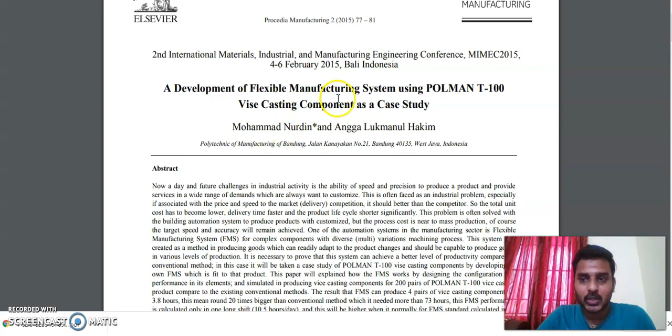Today we are going to see a case study on the development of a flexible manufacturing system using a POLMAN T-100 vice casting component. In this case study, it is given that nowadays the future challenge in industrial activity is the ability of speed and precision to produce the product and provide a service in a wide range of demands which are always wanted to be customized.

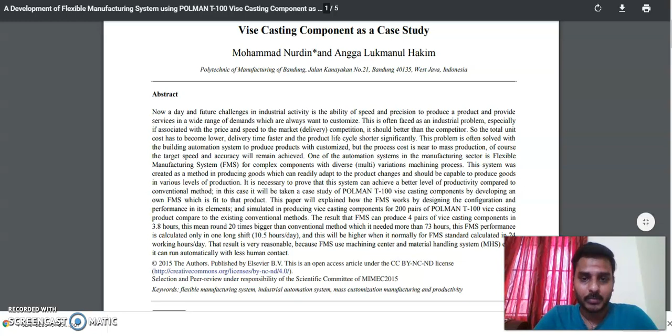Nowadays we are producing a product in the customized format as per customer need. This is often an industrial problem, especially associated with price and speed to market, meaning delivery competition. To solve this problem, they have implemented a flexible manufacturing system into their system, to reduce the price and increase the speed of product making by using FMS.

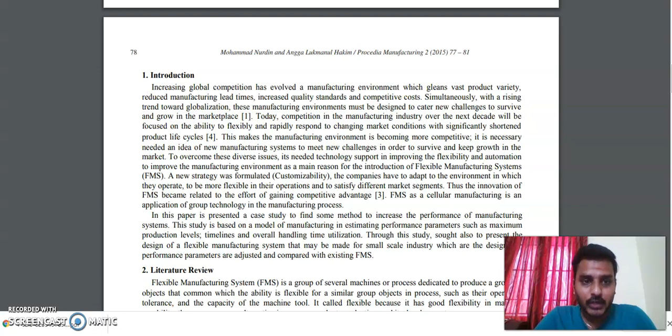The introduction states that increasing global competition in the world manufacturing environment demands a vast product variety, reduced manufacturing lead times, increased quality standards and competitive costs. Simultaneously, with rising globalization, manufacturing environments achieve success by implementing FMS into their system.

From the literature survey, FMS is a group of several machines or processes dedicated to produce a group of objects with common flexibility, like a group technology or part families, by making similar products or similar groups of objects through a single process. This is called FMS.

It is called flexible because it has good flexibility in machine capability. The sequence is alternative in process, product, production and its development. The considerations of FMS as a production system are flexibility, ability and characteristics, as well as the production system for product variations. Flexibility is the foundation and concept used in the design of modern automated manufacturing systems, also called FMS.

Flexibility can be defined as the collection of manufacturing system characteristics that support challenges in activity or production capabilities. In recent times, FMS has emerged as a powerful technology to meet continuously changing customer or product demand, increasing the performance of FMS through better integration of shop floor activities such as machine or vehicle scheduling. Several flexibilities can be achieved in industry by implementing FMS into the system.

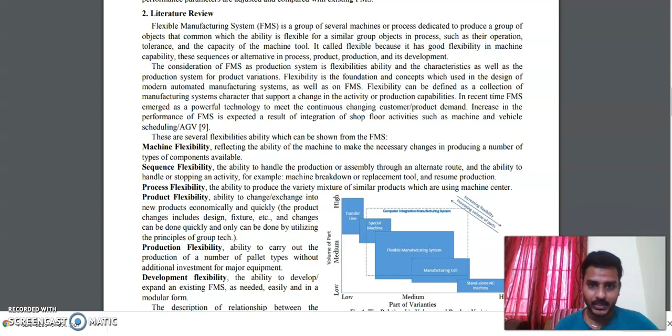Some of the flexibilities after implementing the FMS system include machine flexibility, where the machine has the ability to make necessary changes in producing a number of types or components available, and sequence flexibility, where if there are more production assembly components, it selects a flexible sequence. This includes the ability to handle production or assembly through an alternate route, and the ability to handle or stop an activity.

There is also process flexibility, product flexibility, production flexibility, and development flexibility. These are the flexibilities used while implementing FMS into manufacturing industries, so that we benefit by reducing the time and increasing the speed of the work.

A part of the varieties mentioned includes transfer lines, machines, special machines, which are interconnected with the flexible manufacturing system, and the manufacturing cell standalone NC. If we take this, it is called the computer integrated manufacturing system.

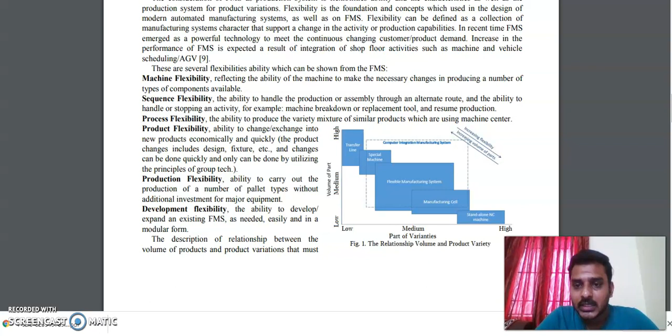Taking this, we can get a benefit of increasing the volume of parts and also increasing flexibility. As a result, the problem identified in this case study is the development of FMS using a POLMAN T-100 vice, comparing the process method between conventional and FMS for casting components.

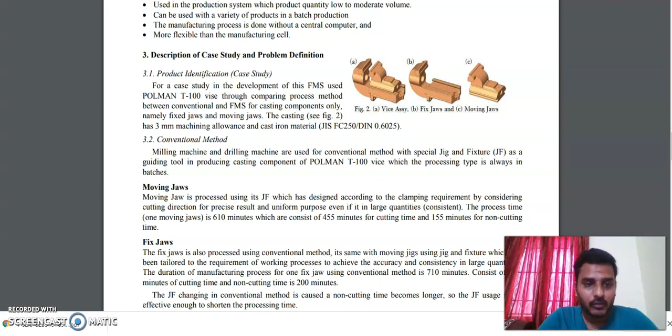They are using conventional methods with the help of a milling machine and a drilling machine, also moving jaws, fixed jaws, and then a horizontal CNC machining center.

As a result of this case study, the production time length is determined with the assumption to meet a demand of 200 pairs of POLMAN T-100 vice each month. By simplifying the table of activity, the FMS operations and production schedule can be increased, continuing for 2 cycles to settle the total time method.

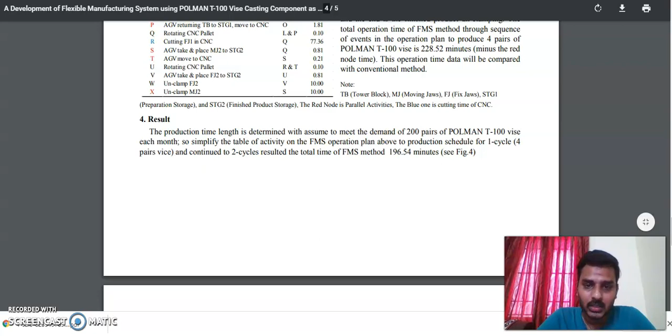The conclusion from data processing is that the FMS method, compared to the conventional method, is about 22 times faster. Also, material handling time is about 5.4 to 1.4 times faster than the first cycle of production.

There is reduced contact with the operator even after materials are ready, as FMS can run automatically. So, with the success of implementing FMS into their system, production time has been reduced, operator dependency has been reduced, and the speed of delivery has been improved.